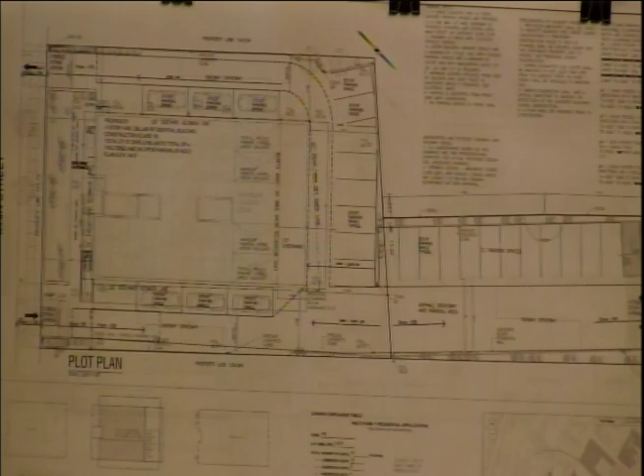How you doing? My name is Angelo Agavino. I'm the owner and hopefully the developer of this project. Happy New Year, guys, good to see you. Thank you, I want to show you guys the new view from New Street that you guys requested.

This is the house to the right, there's a house, this is an existing house right here that we're going to demolish. This would be the driveway entering in from New Street, and this is the house right next door.

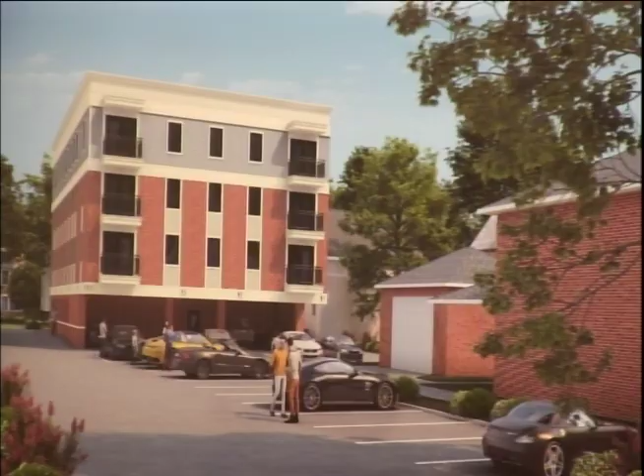So, if you could, this was the previous view - it showed more of the building. So we had the design team step back, kind of step across the street, and get some of that house into it.

Yeah, that's certainly helpful, thank you for doing that. I think the perspective is good because it's deep, it's way in the lot. Absolutely, so I mean, I could give you some dimensions.

No need, I get the idea. I mean, when it's just the house, all you see is that. When you see the existing building next to it, it gives perspective. At least 150 feet, probably a little bit more, but something like that. It's a ways back from the street, so if you're standing in the street, it doesn't look...

Tremendous. Yeah, I mean, because that's offsetting the view. Right, when you show the building, your eye goes to the building. This allows your eye to stray to the right. No, I think it looks good.

Is that landscaping part of the development? It's very pretty, or is that existing? Yeah, well, we have a landscape plan, and the design team kind of just threw some bushes in there, but we hired a landscape architect that we filed with the town, with some trees that they're going to put there. But there's going to be landscaping and trees and bushes in that little planter in the front.

Okay, thank you, leave it there. Yeah, would you? Yeah, just leave it there. We'll keep looking at it. Perfect, makes us happy.

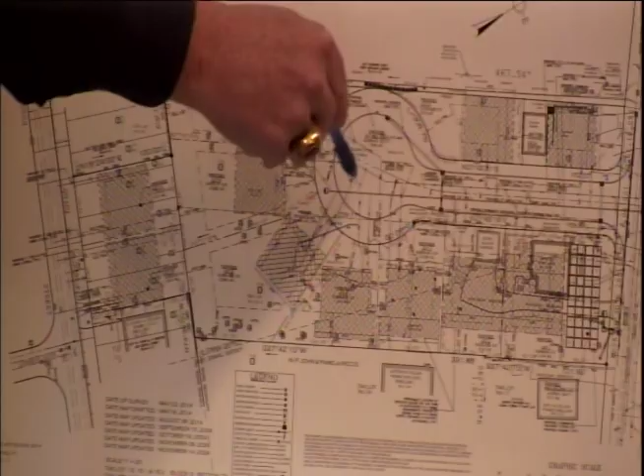There are no zoning variances required either for the creation of the cul-de-sac or for the lots, so they're all zoning compliant.

If you could remind us, Mr. Smith, how many either existing houses or houses that have been removed were on this property or are on this property?

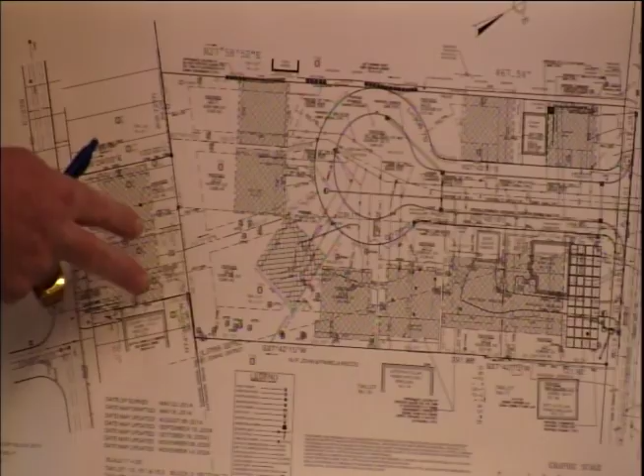Well, okay, so there was, I believe there were 2, and Ms. Basham, just correct me if I'm wrong. There were 2 homes off of Beach Street. Those have both been...

Come on up. Okay, yeah. Yeah.

Hi, everyone. Just to confirm, there was... Name for the record. Oh, sorry. Yeah, Bashkim Kuka, I'm the applicant. There was one house on Beach Street. There was a multifamily house on 104 Highland Avenue, and there's currently a multifamily house on 108 Highland Avenue. So it'd be 3 houses in total. I believe the multifamily house on 104 Highland was a 3-unit, and the current multifamily on 108 Highland is a 2-unit.

Okay, so grand total of, is it 6 units, 3 buildings? Yeah, 3 houses, 6 units. Okay, thank you.

So the total project acreage went from the prior application from 1.81 acres to 2.27 acres. As I indicated in the initial remarks, all of the lots including the cul-de-sac are all zoning compliant.

We have included with the application package a response to the Kellard Sessions review memo, a stormwater management plan, and I would also note that there is one separate lot on the proposed subdivision that is not a building lot, but is used for stormwater management to address that particular aspect.

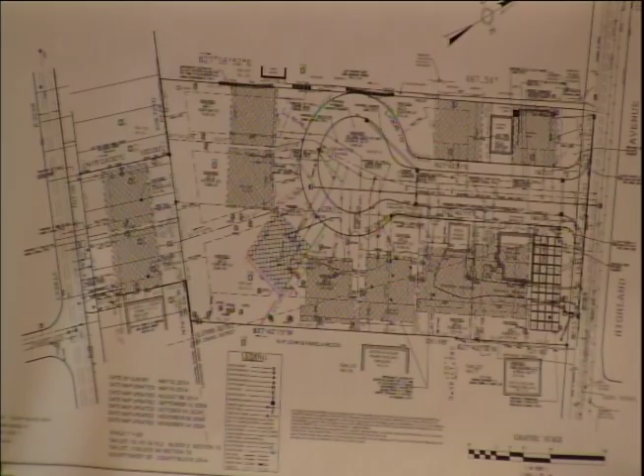Mr. Chairman, that concludes my presentation. If you have any questions, or certainly want to open it up to the public.

No, I don't. Similarly, I'm confident that we've brought this to a point where we feel comfortable moving it forward. I think the Beach Street application, when it was the Beach Street application, was a lot more controversial. I don't know if this is as controversial. We'll find out in a minute, but I think we're heading in the right direction here.

Yeah, I do know that we're going to hear from some people today because there are a lot of familiar faces out there. And we did have a very involved process the first go-round. One of the issues raised, and there was a consensus that everyone would like this a lot better if the cul-de-sac opened out onto Highland, which is exactly what you've done. And I believe the zoning board may have said the same thing at some point.

Correct. So one of the other issues that came up had to do with school buses and school districts. It appeared that certain school-age children who would be living in the cul-de-sac that opened out onto Beach would have to be bused into the Eastchester School District as opposed to the Tuckahoe School District, and that was going to create additional traffic. Has that issue more or less been resolved?

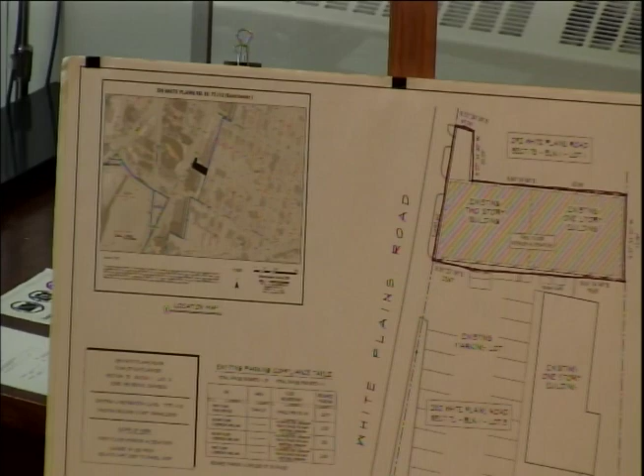Highlighted in red here is the subject lot, and the hatched portion shows the extent of the first floor tenant space. This is an adjacent lot owned by the same owner, which will come up in my summary, so I just wanted to point that out.

The proposed scope of work includes a change of use from a gelato cafe shop to a bagel shop, and we're requesting a special permit for the proposed type 1 food service establishment. All proposed work is internal; there's no proposed change to the exterior of the structure. The new space will have a service counter and a few tables, with most food carried out. We're also requesting a referral to the zoning board for 2 area variances.

The existing property is currently non-conforming with respect to all zoning requirements, including setbacks, building coverage, off-street parking, and off-street loading. Based on a review of the property file, there's no record of any variances being granted for any of these non-conforming conditions on this lot. Over the past 50 years, this subject tenant space has been used as an auto repair shop, a grocery shop, a pet shop, and most recently a gelato cafe shop.

The proposed change in use to the existing tenant space will not create an increase to any of the pre-existing non-conforming conditions. But because the existing tenant space has been unoccupied for over a year, we need to go to the zoning board for 2 variances—the first for the existing non-conforming off-street parking spaces, and the second for the existing non-conforming off-street loading space.

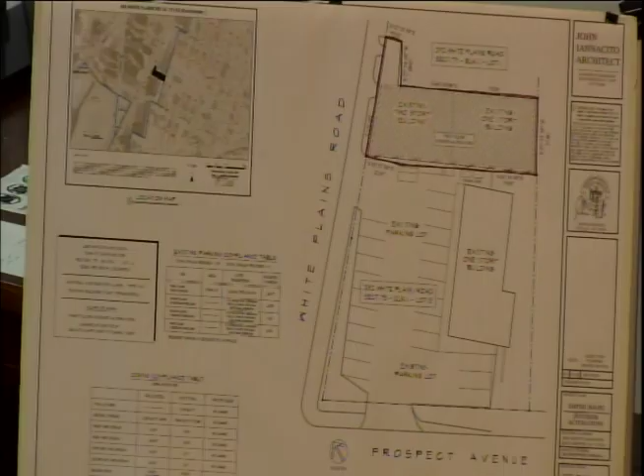One thing you might want to consider is we don't really have information on what the parking utilization on that lot is and how it would align with the operation hours of the bagel shop. For special permits, we typically retain our consultants to study various aspects of the application, so you could ask to retain our traffic consultant to do a parking utilization analysis for that property or for the public parking in the vicinity. As it stands, while custom and practice may use that lot, it's not a certainty they'll remain in common ownership, and there's no legal right at this point, and we don't have information about the utilization there.

I do know that the previous usage was, the sense I got at least, more of an evening place to go as opposed to a morning and early afternoon place. Good observation, because certainly the hours of the insurance agency are standard 9 to 5 type hours. So after I saw the memo that you sent out, I did do a little research on what the parking is on that lot.

The nail salon requires 4.1 spaces based on its square footage, and the office space requires 7.1, so when rounded up, it's 12 spaces total required for that property. There are currently 21 spaces on that property, so there is an excess of 9 spaces now. There should always be some open spaces there.

The nail salon's normal hours of operation are 9 to 7, and they're closed on Tuesdays. The insurance office is 9 to 5, closed on Sundays, but they might also be closed on Saturdays—I'm not 100% sure if they're open on Saturdays. So the bagel shop, from 5:30 in the morning until 9 o'clock, essentially the lot is empty.

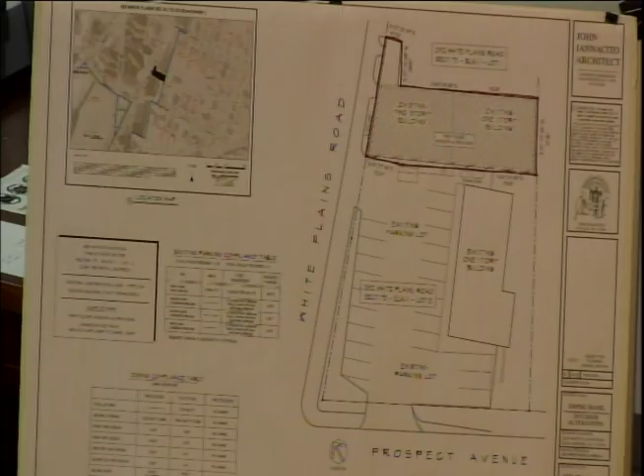Now, again, there is nothing in writing that says if she decides to sell the property tomorrow, that parking continues to be used. I did speak to her about this, and she's willing to put something in writing, or whatever needs to be done, in order to carry that parking over with the tenants of this building, if it need be. It would be in her interest to do so if she's deriving revenue from this property.

I don't think... she has no intent, I mean, she's been there for 30 years, and she has no intentions of selling the property, and she's been dealing with tenants in this building the same way for the past 30 years. Everyone who's come in there has always been able to use the parking.

For the record, I think I've been buying insurance from her for almost 29 years, all from that location. But the method she's been dealing with it is basically allowing them to use their spots, right? Yeah, with nothing in writing, or... well, it might be in the lease.

Is there something in the lease about parking on her property? Yes, there is. Okay, why don't you state your name for the record and answer that question. My name is Jay D'Angelo, owner of Empire Bagels. What do you want to know?

You're representing to us that you have already entered into the lease? Yes, I signed it. Okay, and that lease addresses the issue of parking? Yes, it allows me to park on the property.

Is there a number of spots, or just a general allowance? General. I've been there for the last couple of weeks, and it's been pretty much half empty when I get there, practically all day.

We would want to review the terms of the lease. The issue is on severance of title, right? Yes. Does that lease provision control? Is there some kind of provision that would negate it? Because what you wouldn't want is for that, for lack of a better term, satellite lot to be sold and then render this property without parking, if that's what you're relying on in granting this approval.

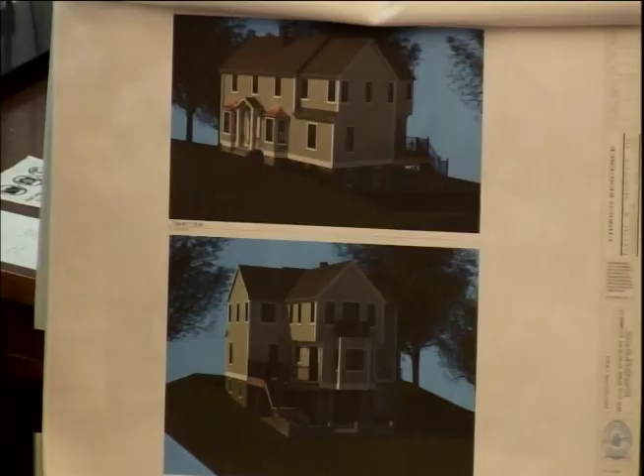you can see in the rendering here. These are the two new bay windows in the front and covered entryway. This portion of the second floor is a new addition for a bedroom, and then the rear of this portion is a second floor addition over the existing house for a master bedroom.

All the siding and roofing will be changed, with all new materials, doors and windows. One comment from the ARB was about the planting along the front of the house, which we'll relocate to the side during construction, saving what's worth saving, and adding new plantings to keep the foundation area landscaped. We're adding stone veneer at the base of the existing bay windows. There was a question about adding stone across the whole front, but there's so little exposure, and with the foundation planting you don't really see it, so that's basically the scope of the project.

The stone you're talking about is the white accent at the foundation, or below it on the plan? The planting is here, there's a new water table board, and about a foot and a half below it with stone, it's concrete. Right now you can't see it because it's planted, but when we scaffold this, the planting will die. They're low-lying plants right now, so you still can't see the foundation.

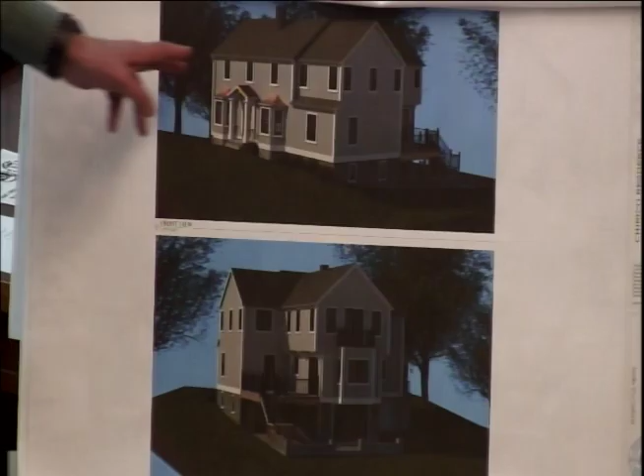Good, okay. Are there any changes in lighting? There are two existing sconces, which you can't see here, but they will remain. Okay, good.

But the back addition, does it all come out? The back addition is a new second floor for the master, over here in this area. That's the addition, yeah, there's a room below that, and it goes right on top of that, above the existing kitchen below.

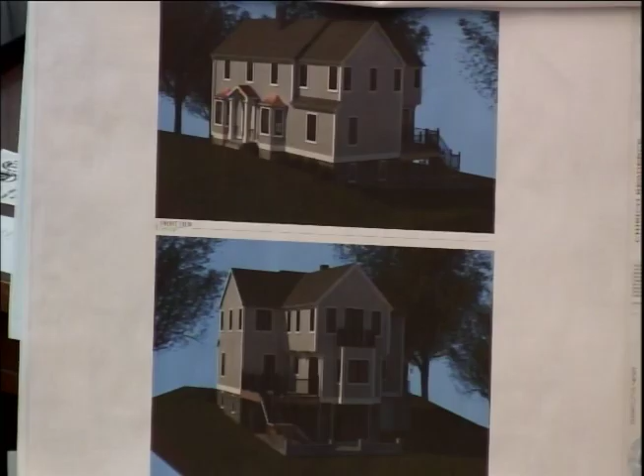Will it match the same finishes, with everything else around staying the same? As far as finishes and the roof, yes, the finishes will match throughout and match the whole existing house. Okay, cool, no need to keep asking questions. I think you've presented it well, and I think it looks very nice.